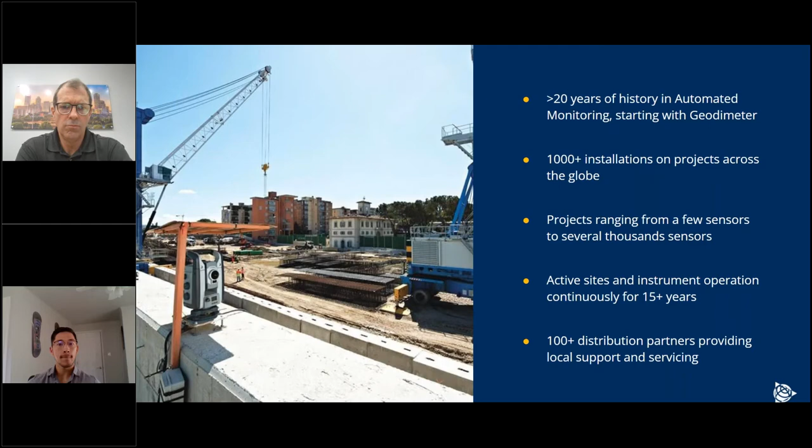We offer everything from semi-automated to fully automated systems. So as we like to say, from the tripod to the pillar installation. The semi-automated is focused on that traditional manual workflow, but really just automating those workflows. So if somebody's going to site with a total station or a GNSS rover or geotech equipment, and they're taking those measurements manually, we're really working to make it easier to do that so it frees somebody up on site to go do other things.

So with the total station and data collector, it's got a module on there that will run the rounds for you. So you can set your total station up, collect with your data collector, run rounds all day long, and then tear your stuff down, go home, come back 2 weeks later, set it up and do the same thing. And then we also have that fully automated setup.

So when you set your total station up in the field permanently to run 24/7, either because you have a higher risk structure that needs higher frequency data on it, or if you're operating for a long time, it just makes more sense to set it up permanently so you don't have to keep going back to the field. We really have a solution dedicated to each of those workflows.

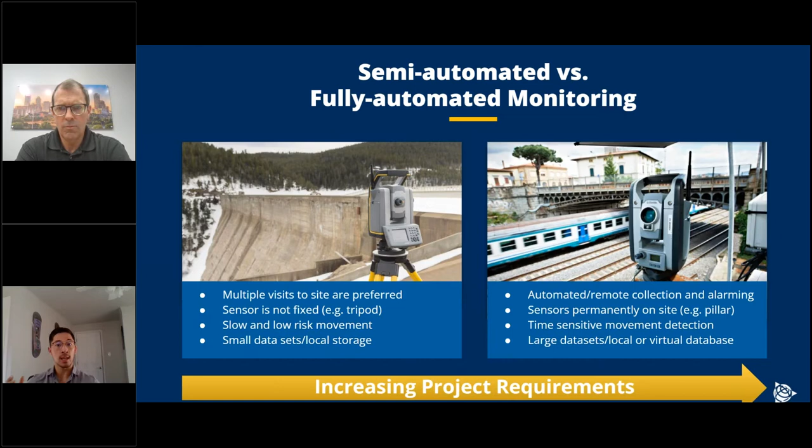Today we're focused most on automated monitoring, so we'll do that highlight for the portfolio. There are really 3 main components to an automated system. One, obviously, is your sensors in the field. And with the automated system, there's a lot more flexibility with the actual sensors that you're using. So you can use anything from the standard total station and prisms, GNSS systems, and adding geotech and weather stations to that mix, really combining all sorts of different data types. Everything in the field is going to need power and communications. Anybody who's set up a system knows that that's a key component.

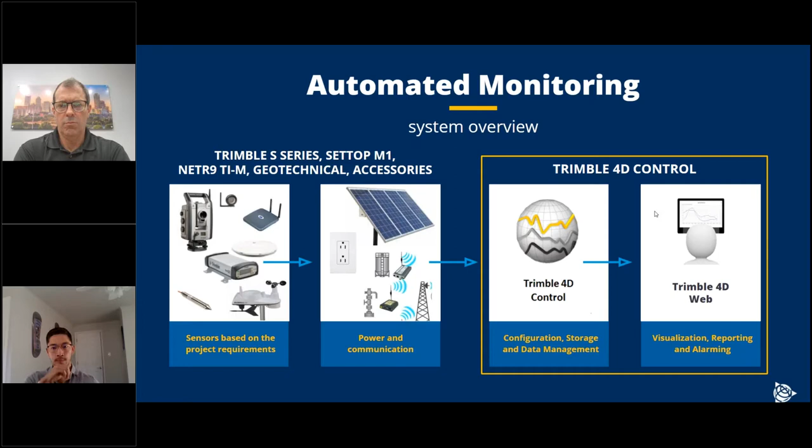And then along with that, we have the software package called Trimble 4D Control, or T4D. And that's split into 2 sections. There's T4D Control Server, which runs as the backend that does all the data collection and data processing. And then the front end, which is called T4D Web or Trimble 4D Web. That's what users and customers are going to interact with. It's the tool we have for visualization and reporting and alarming. Really anything that's going to be data visualization.

For sensors, I'm going to go through that quickly. We use the Trimble S series for the total station. The S series comes in all sorts of different flavors. The workhorse is the S7. That's going to be the all-inclusive total station. It's going to be available in robotic and auto lock flavors. So if you're going to do some robotic surveying, you can use it and deploy it in multiple places. It's really good for general surveying. It's also really good for monitoring. It's just the standard deployment for total station.

We also have available the S9, which is specable with a lot more options. So it's really similar to the S7, but you can get it in higher accuracy EDM and higher accuracy angular specs. And you can also get it with long range FineLock. So if you have some more specialty applications that require higher accuracy or longer range, you're going to want to go with something like the S9.

And then we also have the S5 Ti-M, which is the scaled back version that's totally dedicated to monitoring. We don't deploy these as often, but it is available. So if you need something dedicated to monitoring, you're going to set up maybe in a rough environment that's going to run for a bunch of years and you're not planning to deploy it anywhere else, the S5 is a good option for that.

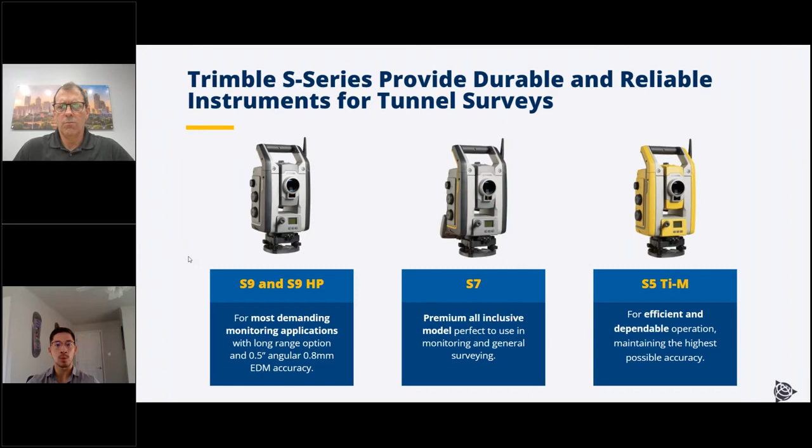The total stations are extremely reliable and durable. They are IP65 rated and use a frictionless magnetic drive system, so they're super impervious to things like moisture and dust. It lets you set it up in the field and know that it's going to keep running, and it's totally designed to be out there 24/7. You don't have to worry that if it rains, you're going to have to get a new total station or something like that. It's really designed to give you the confidence you need to install it and run it all the time.

They're also super interchangeable. So if your total station needs to be calibrated because it's been out there for a bunch of years, you're more than free to take it off of the tribrach, put a different total station back on, do a hot swap and keep running. Get the other instrument repaired or calibrated, and then put it back out in the field.

The S series is also our standard survey total station, so it's really easy to deploy. If you're a surveyor and you have a few at hand, you can take one out of your fleet, put it in the field and have it run for a bunch of years, and then take it off, put it back in your fleet and use it for surveying applications.

Most total stations are also specable with Trimble Vision, so you can have a camera in your total station that makes it a lot easier to manage your site. You can do things like add targets remotely or check the status of the site without having to go there. Monitoring sites can a lot of times be a few hours away from your office or where you live.

So if you're doing something simple like adding targets, it can save you a whole day of travel. You just open the instrument, add the targets, it takes 10 minutes, and you close it and go about your day. Instead of having to drive 3 hours to site and 3 hours back, you can just do it during your lunch break.

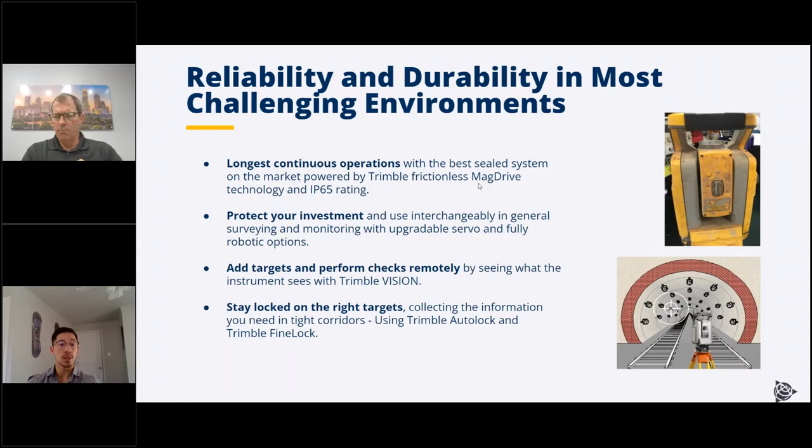We also have GNSS offerings. As you know, Trimble makes a lot of GNSS. We have everything from survey rovers to base stations and everything in between. GNSS monitoring is great for high interval monitoring, where you need to take data at 20 hertz instead of every few minutes. Collecting data from a GNSS receiver is a great way to do that.

It's also good for widespread settlement and regional monitoring. A total station has a range of 1,000 meters, 2,000 meters, but a GNSS antenna can cover an area of a city, a state, a county or something huge. T4D is also really good at GNSS processing, doing a combination of real-time and post-processing to get rapid alerts and high accuracy results. It's all super customizable and really easy to set up.

It's also super flexible, so you can use your base stations or your monitoring stations as one or the other. If you have surveyors on site, they can connect with their rovers and do RTK or VRS corrections from the receivers directly. Then you have a multi-purpose receiver. It's not just dedicated to monitoring, and it's not just dedicated to being a site base station, but you can use it for both applications.

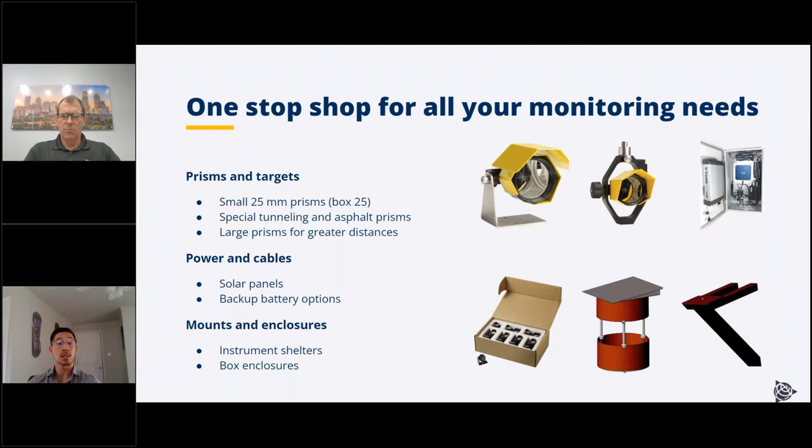We also have all the accessories that you would need to turn your total station or GNSS or geotech equipment into a fully automated system. So things like prisms and housings and mounts and things like that. We're really a one-stop shop for everything you would need for monitoring.

We have all different flavors of prisms. So depending on your needs, if you're doing your standard job where you just want to set up 50 prisms all in L brackets, we have those. Your long-range prisms, your integrated GNSS, and your specialty prisms, pretty much everything is available.

The mounts and enclosures as well. And so we have high security or high protection options for your total station mounts. We can do wall mounts and pillar mounts. So any installation you have, we can work with it. As well as cabinets either for the M1, which is the field controller that we use for the total stations, and one that is large enough to house both the M1 and your GNSS installation. So if you have both on a site, you can put both in the same housing and just simplify the power and housing solution that way.

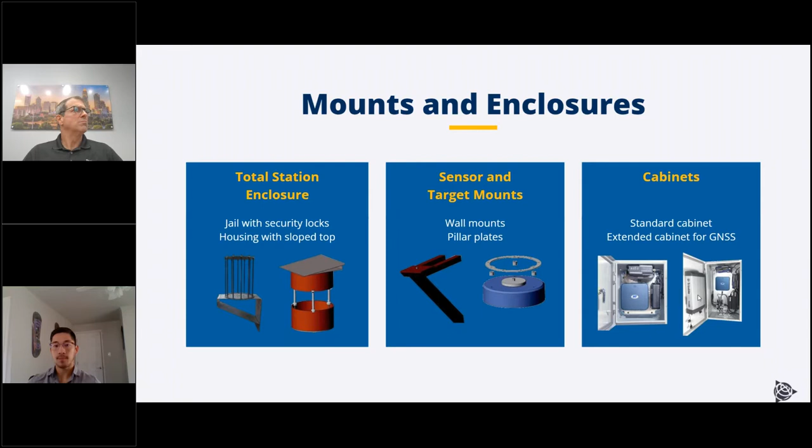In addition to kind of that standard geospatial portfolio, we have now geotechnical sensors. Now I won't go into too much detail on here because the world of geotech is deep and immersive, and we could spend hours talking about that on its own. But basically how it works is we have geotechnical sensors, whether they're going to be data loggers that are connected to something like a piezometer or a vibrating wire sensor, an extensometer, crack meter, or something like that. They'll take data automatically from those sensors and send it via long-range radio to the gateway.

In addition, we have laser distance meters and tilt meters that can measure convergence and tilt on structures. All the sensors communicate with long-range radio back to the gateway. So the deployment is extremely flexible. We can have your gateway up to 15 kilometers away from your sensors. So you can have this at like a site office or an office down the street from your actual construction site or monitoring site, and everything's going to communicate and come in no problem.

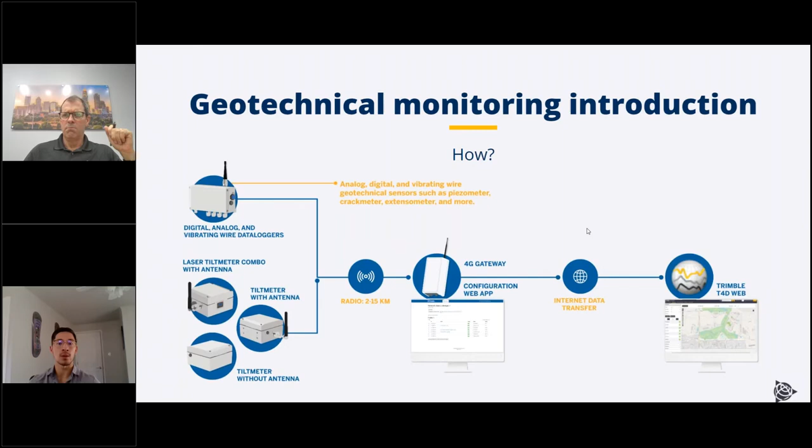It transfers the data via API into T4D Web. And so you get all the standard features of T4D Web with your data visualization, reporting, and alarming, with your geotech sensors, and if you're using it with all your sensors in one place, so your total station, your GNSS, and your geotech.

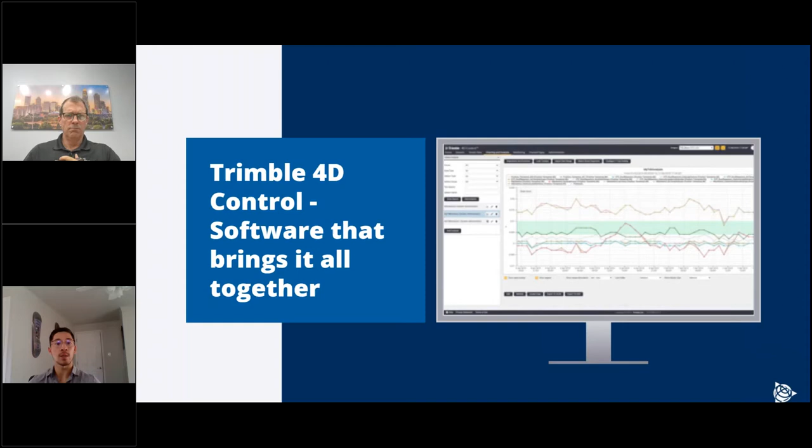T4D is the software that kind of brings everything together. So it's really meant to make managing the site that much easier. There's a lot of different visualization tools and reporting tools that you can use in there. So whether you're doing a simple chart or you're doing a heat map, or a scatter plot or anything like that, it's really made to give you the tools that you need to show the health and the status of your site. So it's a really easy to use sensor management and data integration portfolio.

There's a really powerful backend that does the geodetic processing and adjustments for your total station and GNSS. And there's all the visualization and reporting tools. So it makes it really easy to come in and see exactly where displacements are at if you're using the heat map. You can make charts and visualization tools that combine multiple data sets. So if you have your geotech or your GNSS in combination with your total station, you can pull all that data in one place and show it as one coherent data set.

There's also the conditional alarming and reporting. So the same idea being you have a way to kind of cross-validate data. And so if you're doing, for example, a rail project and you have a combination of tilt meters on the ties and prisms on the rails itself, you can have charts and reports and alarms that show that data in combination. And so you can also have a self-validating alarm that has to check: the tilt has moved this much and the prism has moved this much. And so now the alarm is real and it triggers and alerts everybody on site. So it's really designed to be as simple or as in-depth as you need it to be, depending on your project requirements.

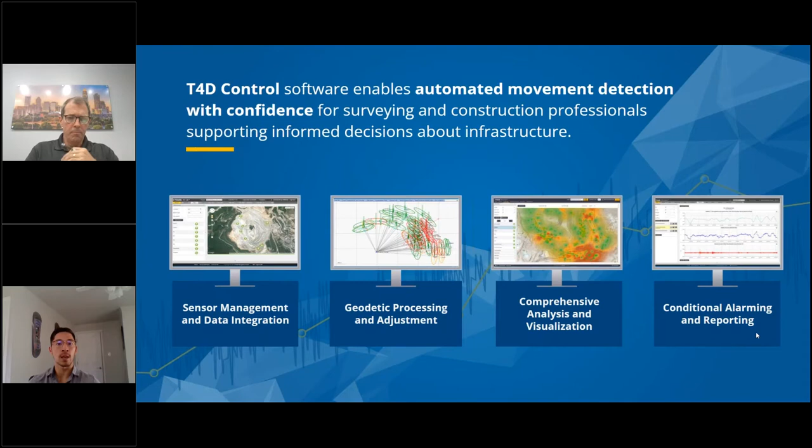T4D, one of the most powerful aspects of it now is that it can integrate all three data types. And so whether you're doing a project with just total station or a project with just geotech, or if you're doing one with a combination of all three different data types, you can bring it all together and use them kind of as needed. Perfect. And that is my overview.

Do we have any questions come in? It's hopefully pretty straightforward.

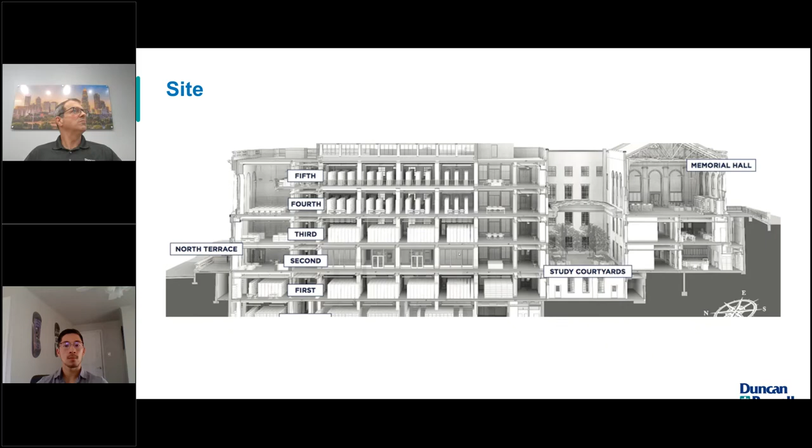So what the university wanted to do was make better use of that space, and now they're building a state-of-the-art library addition where the old stacks were. Part of the challenge is that we have to tie to the existing structure, and the courtyard is a very sensitive area of that structure. The wings have total stations installed in all of those.

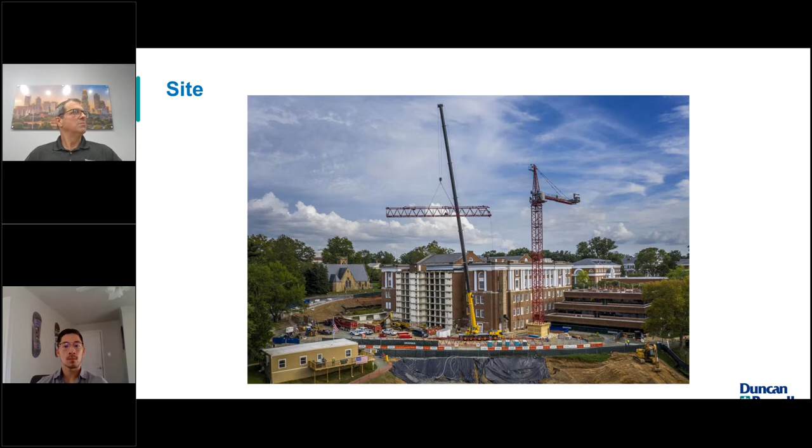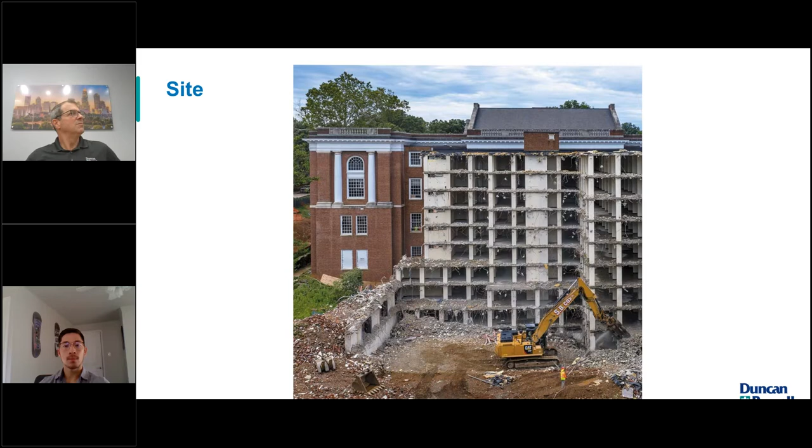What you're seeing here is the building has been partially demolished, and you're seeing the wing over there on one side. They've done demo and are also underpinning all the new foundations for the building. The new structure is going where the old structure was, and also being expanded, making a larger footprint of the library.

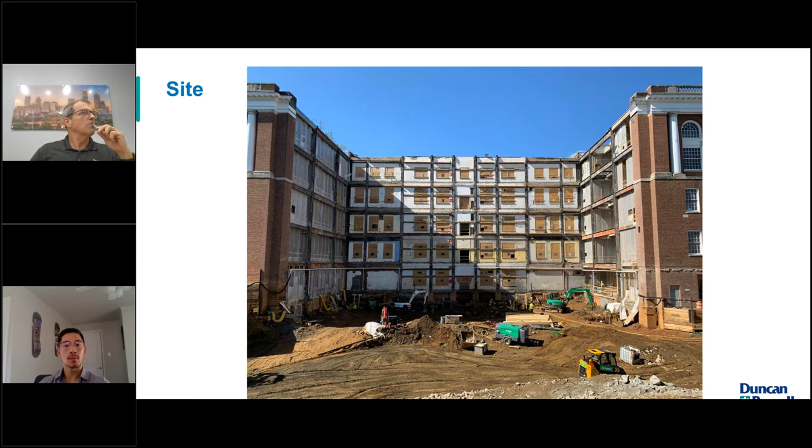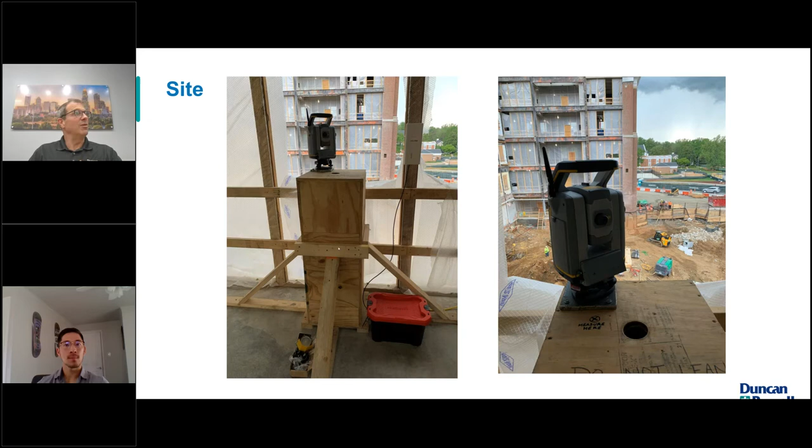I like how they wrote "Do not lean" on the mount there. It's important. Resting against it. But both of these are very stable. They worked out really well.

Was there any monitoring done during that demolition, or anything else done? There was not. The original plan was to have everything installed before there was any demo whatsoever, but that isn't how the project progressed. Like a lot of construction projects, it's a changing environment. You don't really know what's happening until it's there. So in some ways it wasn't ideal because we didn't have any baseline measurements going into this.

After the demo was done, that's when we started installation of these targets, and Skanska actually installed the majority of the sensors on site. That's right. So Skanska put most of the prisms up. Yes, they did.

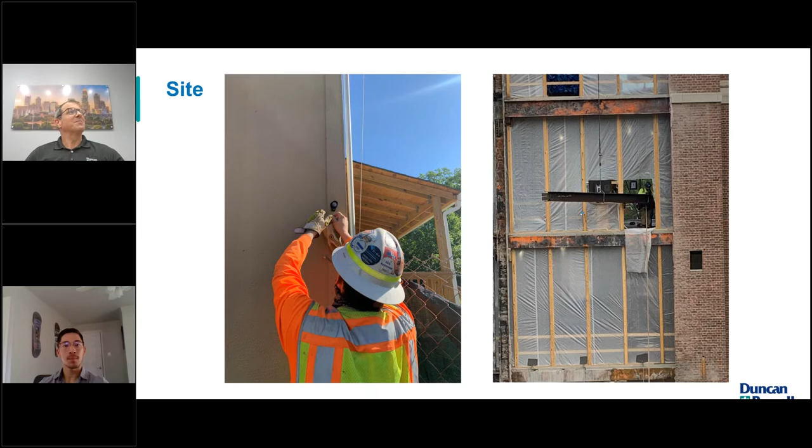I put this image in here because it's a typical construction site. We're working on one instrument, and all of a sudden they cut this hole in the plastic and start flying steel in like 3 feet from other instruments. Oh my God. Just typical. So that's really the project and the images I had.

There's feedback on your side, I think there'll be an echo or something. Is that on Cheryl's side? I'm not sure. Can you guys hear me okay? Yeah, I can hear you now. Okay. So that's all the images I had of the project. And I can stop sharing my screen if I could figure that out. There we go.

So the rest is really an interview with Cheryl, discussing our combined experience. Cheryl, you said you were brought into this project because you had a relationship with Skanska, you were already on site surveying, and then you brought in a partner to help with the other geotechnical type instruments, settlement and vibration. Were you given a monitoring plan describing where the instruments or prisms should go, or did you have to develop that on the fly?

Cheryl, you're muted now if you're trying to talk. Unmuted. Yeah,

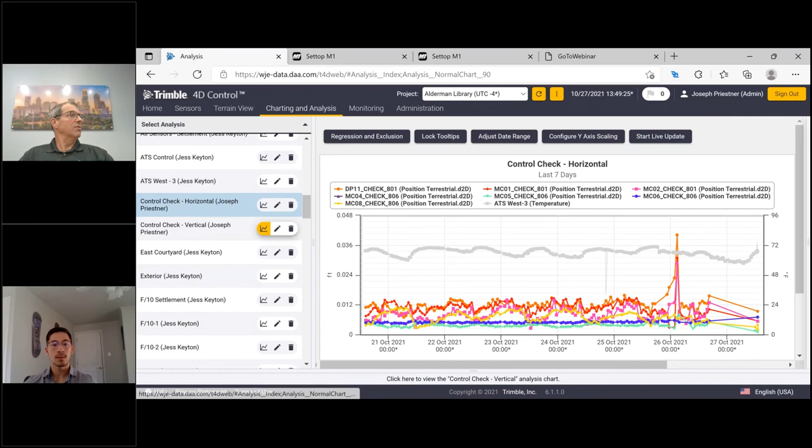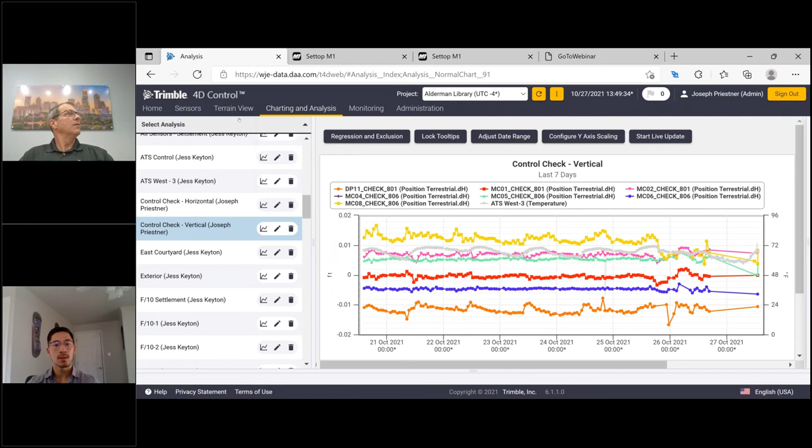Joe, would you mind showing that custom view one more time too? That view of the horseshoe with the targets there? I know there's a good anecdote about some of the displacements on there. Oh, yeah, this one, actually I have to click on it. So this column right here was the problem child in the beginning. They started working on this foundation. They're underpinning all this, and this column started to move. It was right in the very beginning of the project. And so everybody was questioning, is that really movement.

But we could show them that the other ones weren't moving. We got two thousandths here. All these other columns weren't moving. It was very early in the project, and you could see the trend in this graph. The trend was evident. It was moving about half a hundredth a day. And it was also with settlement as well. So it was not only kicking out into the excavation, but it was settling. So you could see what was happening, and they finally caught it.

They finally stabilized it, but this was the one that was causing the consternation over a 32nd of an inch, because it was a 32nd of an inch underneath the threshold to shut the job down. So bouncing back and forth. Yep. And so that's why it became all of a sudden a critical issue.

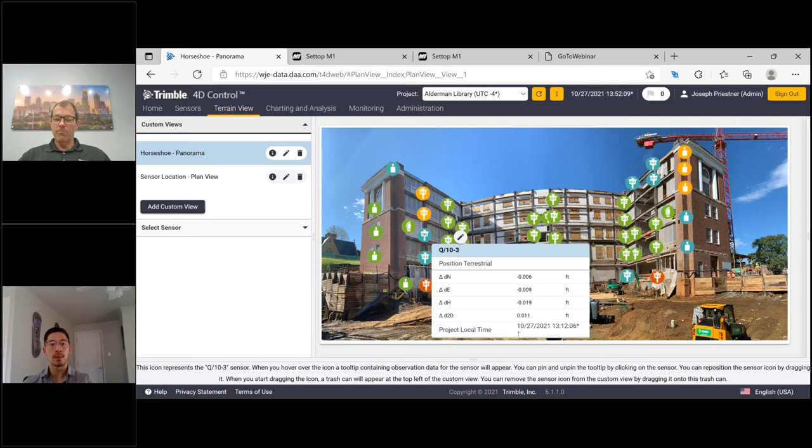Yeah, that's a question for Cheryl. I think she said once a week, right? It's actually supposed to be every 2 weeks. Had an issue with our data collector, so we're a little bit overdue, but we're out there monitoring right now, actually. So, but yeah, basically every 2 weeks.

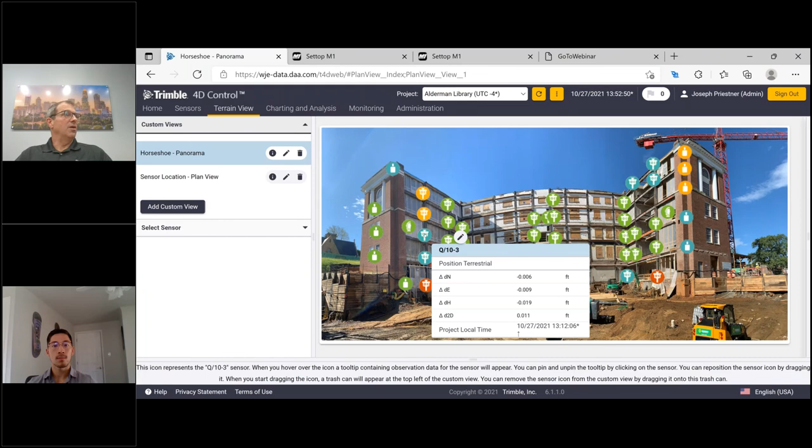Yeah, so they just take those coordinates, adjust the coordinates, then import them, make sure they have the right IDs, and then import them right here in the website. And it updates all the graphs. They can get all the same kind of graphs on these that they do on the automated points.

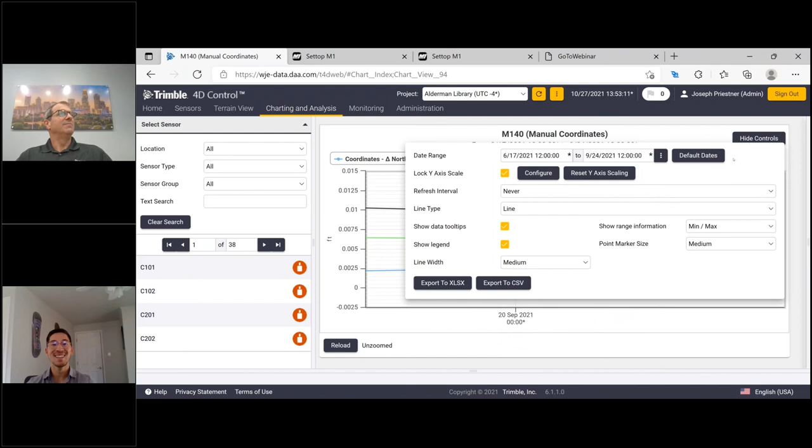He's got changes, dude. See how long you've been doing this one. Yeah. Oh, sweet, yeah.

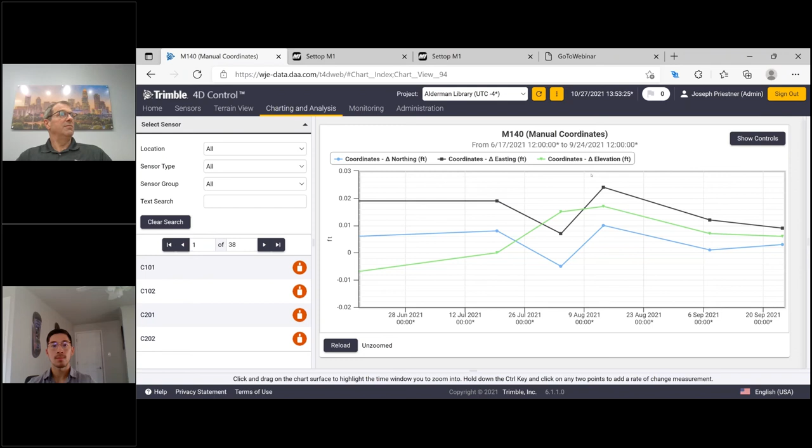Yeah. So same type of graphs. But you can see, these graphs are all editable. You can turn things on and off. The analyses are where you have regressions and things like that you can do to spot trends.

Okay, we're getting close on time. Let's see. Yeah, I think we just had one more question come in, which is kind of to do with the accounting and project management. And so this is a web page. You can publish it to a public URL. And because it's accessible via the internet, we want everything to be kind of locked behind some security.

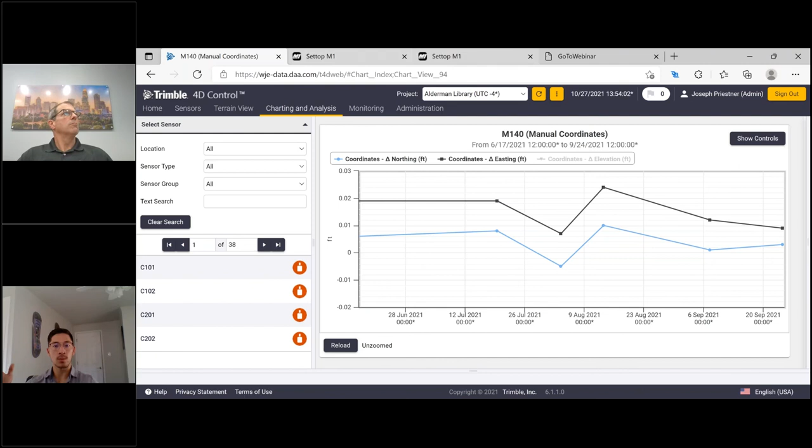So anybody that has access to the system gets set up with an account that is bespoke to them. It's their email address with a custom password. You can also set all sorts of different access levels there. And so a lot of people are just going to have kind of read-only access to this, where they just come in and see the charts and receive reports. And then you can have some key people be analysts or admins on the project.

And you can also have multiple project sites run through a single instance of T4D. So if Scansco is running this Alderman site and another site at UVA, you could split it into 2 places. And then just people working on one side or the other can receive reports and emails that are only relevant to them. So not seeing multiple data sets they don't care about. So things can be very customizable that way.

Yeah. And there is an IT component to this. So if you're going to tackle an automated monitoring project, you're going to be installing. You probably want to dedicate a server to it. You're going to be running Microsoft SQL Server. Most of our customers are now running it in Azure. It's fully Azure compatible.

This one, Draper Aden's IT department is very good, very proactive, very responsive. Most customers will let me get into their server and have a user ID and log in. Draper Aden is very security conscious for a good reason. And so all I do is I send them a GoToAssist link, and I haven't waited more than 5 minutes to get into their server to troubleshoot something. So their IT department is great, but if you have an IT department, involve them.